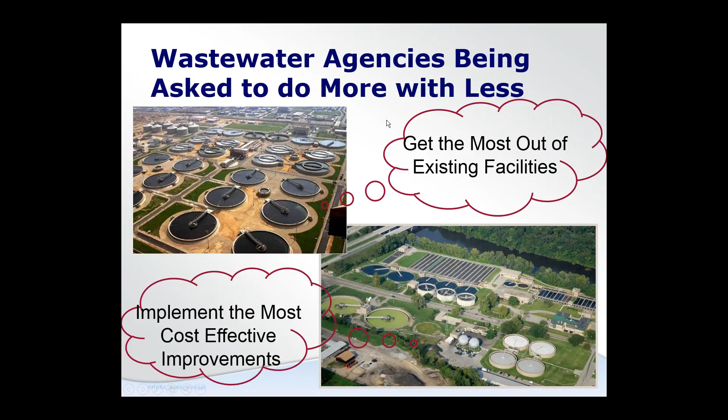With that, it sounds like we're off. Hi, everybody there in the Northwest. I'm Steve Walker, and this other voice next to me is John Fraser. We're in the Denver, Colorado area today, but feel very fortunate to speak with you up there. I'll just preface that I'm struggling through a migraine today, so if it sounds like I drop off the end of the world, there's a reason for that. John knows enough to pick up when I struggle. So off we go.

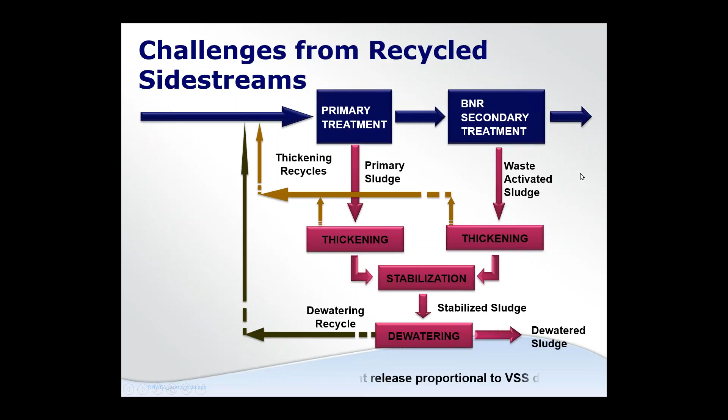Just to set this up at the beginning, there's a reduction in nutrient standards happening throughout the United States. We've seen ammonia standards ratcheting down, and now there's a focus on total nitrogen, which includes ammonia, nitrate, and nitrite in everybody's effluent. This is happening from Maine to Florida and from Southern California to the Puget Sound. On top of that, regulators are also now focusing on total phosphorus. Both of these reductions tend to happen in the same type of secondary treatment processes, so we actually have competing treatments happening in basically the same footprint.

At the same time, I'm an operator, John's an engineer, and wastewater agencies are being asked to do more with less. As an operator, we're trying to get more work out of existing facilities, existing personnel, and existing budgets. Engineers are being asked to implement the most cost-effective solutions. So how can we go about removing this ammonia and nitrogen, and also removing phosphorus, without driving up our ratepayers' budgets or costs?

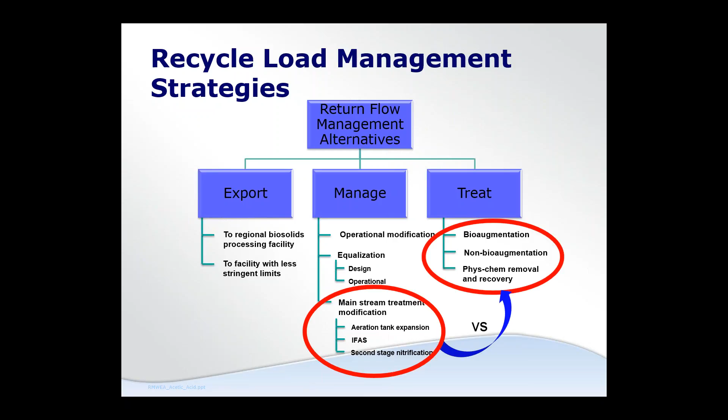Is there any advantage in a cost profile and a performance profile for handling side streams separately? Some of the challenges: there's streams that come off thickening, and streams that come off dewatering, particularly after solid stabilization in an anaerobic condition. These have several impacts. In the digesters, for example, the release of nutrients returned through recycle streams from dewatering is proportional to the VSS destruction. As volatile solids are destroyed, they release their cell material, and that cell material contains a lot of nitrogen and phosphorus.

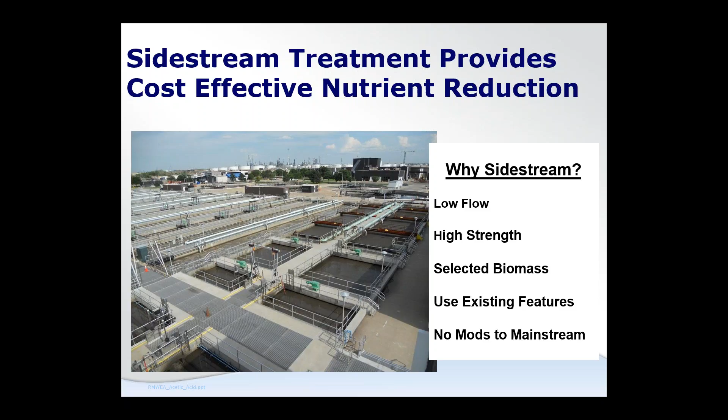Let's take a look at what side stream treatment might be able to do for you. There's different ways to tackle nutrient management. We can export our problems to somebody else with regional facilities or to facilities that have less stringent limits—these are likely not long-term feasible. We can manage these problems with operational modifications through equalization or mainstream treatment modifications, or we can treat it through some sort of biological or physical-chemical treatment. For us today, we'd look at the difference between doing mainstream modifications versus managing or treating the problem.

So for today, we're looking at side stream treatment, and we're going to start focusing in on exactly what was experienced at the Denver Metro plant and then how that can be applied elsewhere. Side stream treatment does provide some cost-effective nutrient reduction. Why would we even entertain side stream treatment?

Primarily it's a low flow—you're just treating a small portion of the total flow in any treatment plant. And it's a high strength flow, so we've got a better idea of what kind of load we're dealing with in that small flow. We can use a selected biomass—you'll find out as we talk further today that we can actually grow nitrifiers in a little nitrifier-type environment to go after the ammonia in a localized environment. We can use existing features if they're there, for instance an extra tankage, an extra primary clarifier or two, or aeration basins that have been taken out of service for some reason. And there's probably the ability to do this without modifying the mainstream treatment processes within the treatment plant.

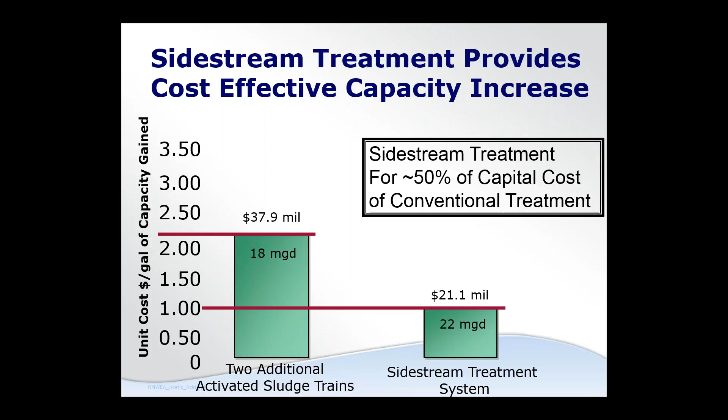In this particular example, this is exactly what happened at Denver Metro. In 2001, we went through a master plan study to look at the best approach to deal with the ammonia load being generated at that treatment plant and arriving at that treatment plant. In round figures, the ammonia load coming into the treatment plant was about 60% of the total ammonia load, which meant the centrate from dewatering was 40%. Those numbers were actually 8 to 10 tons per day coming into the plant and 6 to 8 tons per day coming out of centrate treatment on bad days.

So we had to figure out a way to do this cost effectively. Throughout the master plan, we focused in on building additional aeration basins with additional clarifiers to handle that load in a traditional manner.

As we got into that, we determined that was going to cost, in roughly 2001 dollars, $38 million to build 18 million gallons of capacity. Big numbers, this was a big plant. At that particular time it was a 167 million gallon a day footprint. So as people got to putting their heads together and thinking about different ways to go about it...

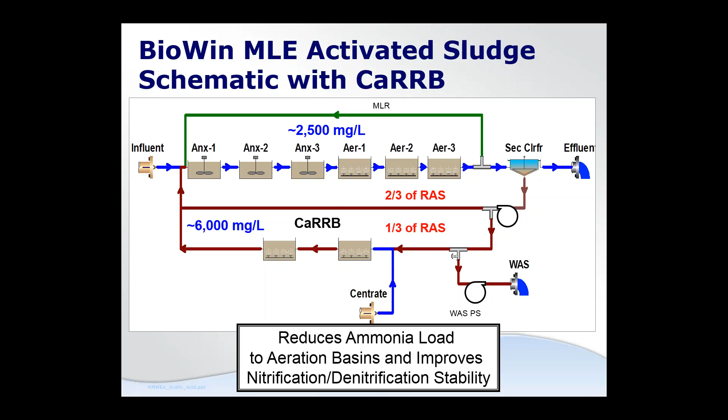We call it CaRRB in case anyone wonders, because the title, centrate and RAS reaeration basins didn't fit on the title block of the drawing, so we had to shorten it up. If you ever hear this term, that's simply what it means: centrate and RAS reaeration basins. Pretty much calling it the name that it is.

So we've also shown here a schematic that's more BioWin type output, for those who enjoy process simulation modeling, that essentially shows the same system: a multi-stage MLE process with some aerobic and some anoxic zones, a RAS return coming off the clarifiers, and then a portion of that being routed through a CaRRB basin for sidestream treatment with centrate being fed into the CaRRB basin.

Typically what we designed around in this case is about one-third of the RAS flow going through the CaRRB basins and about two-thirds of the RAS flow bypassing the CaRRB basins. Actually, Metro's done some testing on this, and they can manipulate the environmental conditions and get different performance outcomes by varying the amount of RAS that they put through the side stream treatment.

So if you think about this, and you have a typical activated sludge that's running at maybe 2,500 to 3,000 milligrams per liter of mixed liquor in the aeration basins, that goes through a secondary clarifier, and there's a compression factor on the RAS, let's say it's 2 to 3 to 1 -- I think we've shown 2.5 to 1 here. That puts a mixed liquor concentration of about 6,000 milligrams per liter into the side stream treatment basins.

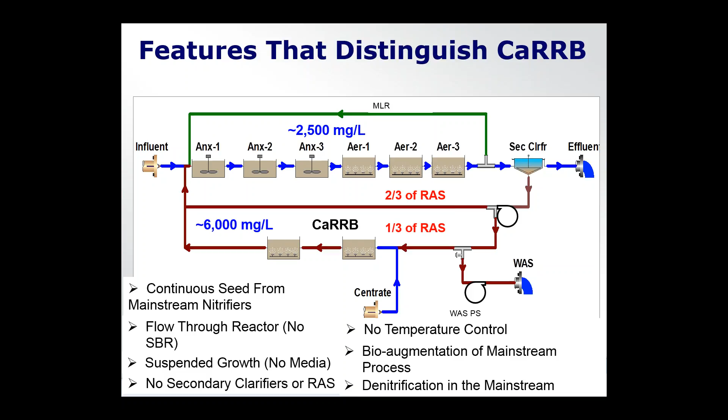We get a continuous seed of mainstream nitrifiers from that CARB basin; it's constantly being fed 24/7 RAS flow, and it's consistently fed centrate. So anytime there's flow coming into that basin, there's flow going out, and that flow goes back into the influent, back through the aeration basin. So there's nitrifiers consistently going to every aeration basin that's being fed, that's in service that particular day.

There's flow going through the reactor. It's not a sequence batch reactor type of process as some of the other different types of ammonia reduction processes are out there. From an operator's perspective, I'm not a batch type of person. I like to be able to operate something continuously, turn it on and off when I want to, not wait for it to run through a cycle.

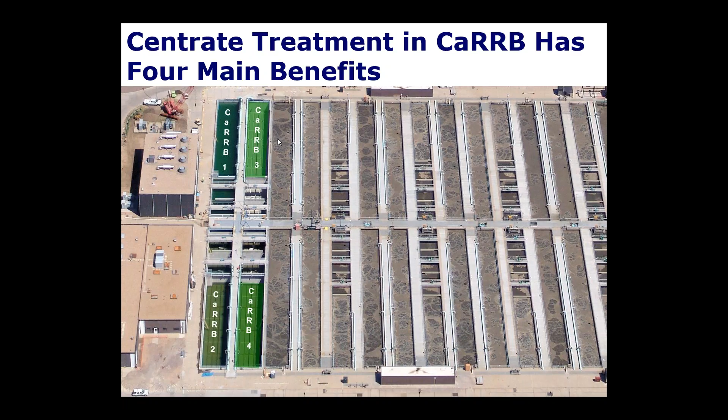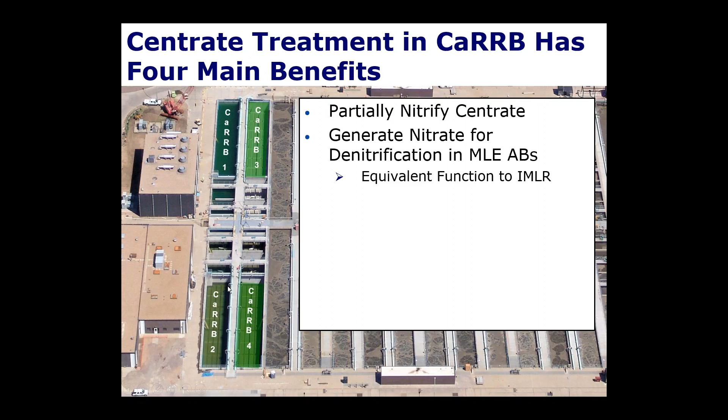It's suspended growth. There's no media, not an IFAS type media with certain nitrifiers growing on it to do this kind of work, similar to an ANITA Mox. I know Dr. Meltzer talked about DEMON and Anammox processes. There's one called ANITA Mox that's essentially an Anammox with IFAS media. This particular process doesn't rely on any attached growth on IFAS media, so it's a different kind of maintenance requirement than for the carb type basin. There's no secondary clarifier, and there's no additional RAS required.

There's no temperature control. The Sharon process, we know, requires temperature to maintain the ammonia reduction. This one, there is no temperature required to maintain the carb process.

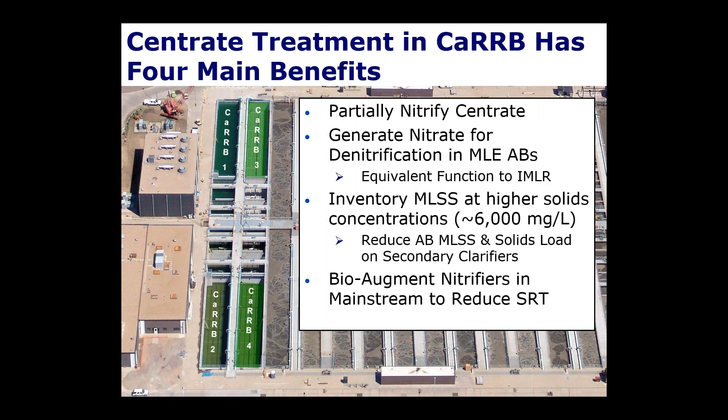It does provide bio-augmentation of the mainstream process. What that basically means is there's a whole group of microorganisms ready to do nitrification, flowing into these aeration basins, into those anoxic zones, ready to go to work. These guys are on steroids, jazzed up and ready to rock and roll. And there's denitrification happening in the mainstream, something we discovered over time, and John will elaborate in more detail, but there's additional treatment happening within the different channels and flow streams on the treatment plant.

This is what the actual plant looks like. You'll notice these carb basins are over here on the left-hand side of the screen. There are 4 of them, carb basins 1 through 4.

When this treatment plant was originally designed in 1965, Mead and Mount were the designers. They are no longer in business as far as I know. But this particular area where these carb basins were set was left open, and for years we used to play basketball right here and have picnic tables. It was set up for some sort of pre-aeration or secondary treatment by the designers in 1965. That area became available, and as we got into the master planning and then the planning for this particular project, it became apparent that this was an ideal spot to put this particular material.

The benefits of our carb process, just to drive them home again: we partially nitrify the centrate. On the next slide we'll show you where it comes from. We generate nitrate for denitrification in the MLE basins. It provides the same function as internal mixed liquor recycle.

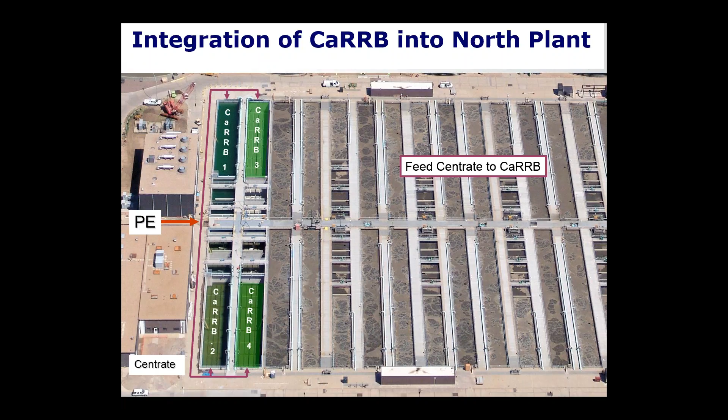We inventory MLSS at a higher concentration. The bugs inside of the carb are 6,000 milligrams per liter. The mixed liquor inside of the aeration basins is roughly 2,000 to 2,500 milligrams per liter. That reduces the load on the secondary clarifiers, which was of tremendous importance in this particular treatment plant.

We bio-augment, once again, we put these nitrifiers into that mainstream, which gives us a boost in treatment.

This is what the plant looks like. The PE comes right down the main channel here. Centrate is brought in, roughly 1 million pounds a day worth of centrate going into 1 of 4 carb basins. Each one can be fed equally or in any proportion thereof.

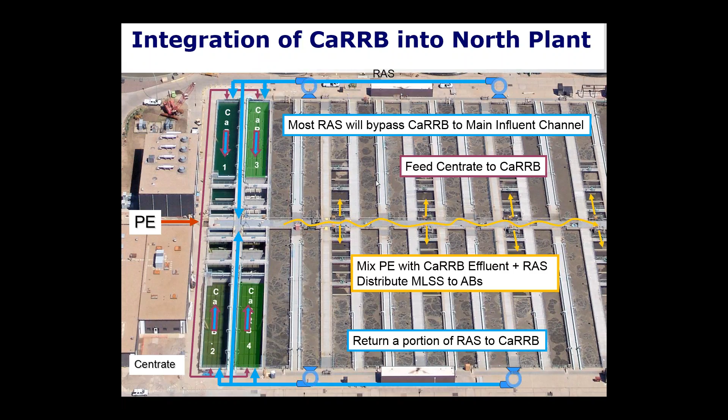Over time, the district has been experimenting, and right now I believe they're running 2 basins in a carb process, and experimenting with 2 other ones in some other modified form of ammonia removal as they play with their processes.

Once again, the PE goes right down the middle, and in the original old plant, these were 4 distinct quads. There were 3 clarifiers and 3 basins connected to 1 RAS pumping station. For me as an operator, I had 4 distinct treatment plants I had to operate out here. It was a pain, trying to figure out which one was operating as what. With a rectangular channel and basin, with square rectangular gates coming off the side, loading into each one of those basins was never quite the same.

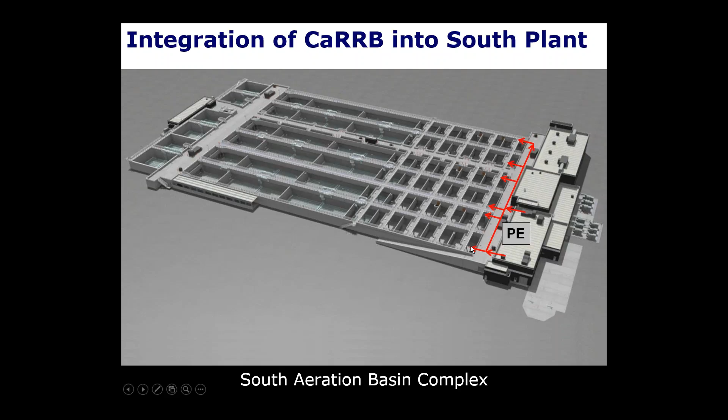So between basins, you could go from one basin to the next one side by side, and there would be a 400 to 600 milligram per liter difference in the concentration of the material inside of those basins. It was driven just by the way the main channel fed these basins.

As part of this upgrade, that feeding problem was eliminated. The RAS originally came back from the clarifiers into one of these 3 basins. The clarifiers did not withdraw consistently, and we always had a blanket on the furthest one away, but wouldn't have a blanket on the nearest one. Once again, you'd have problems with solids blowing out of one of the clarifiers. That was modified as part of this project.

But the important thing to note here is this RAS is now brought back and introduced into the carb basins. It's also introduced right between the carb basins back to the main channel, as demonstrated by that arrow. So roughly up to 70% a day of the RAS goes right past carb back into the main channel, mixes with the PE effluent, and goes into the aeration basins.

What this provided was a common influent to every one of those aeration basins, and I'll demonstrate in the slide coming up here. We had common mixed liquor concentrations throughout almost immediately after starting this process up.

So the district incorporated this carb process for sidestream treatment into their north secondary modifications, and early results were successful for them. So they elected to incorporate the same process into their new south secondary plant. This plant just went online the first of this year, when the new discharge criteria for the river went into effect.

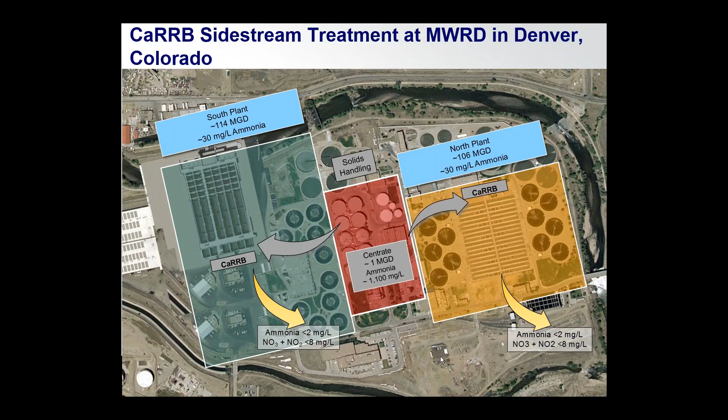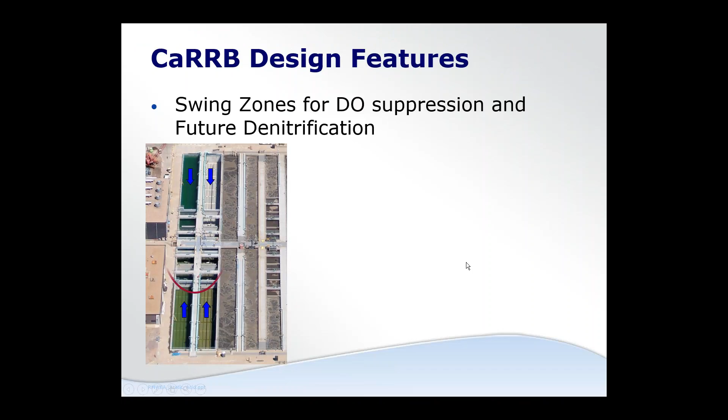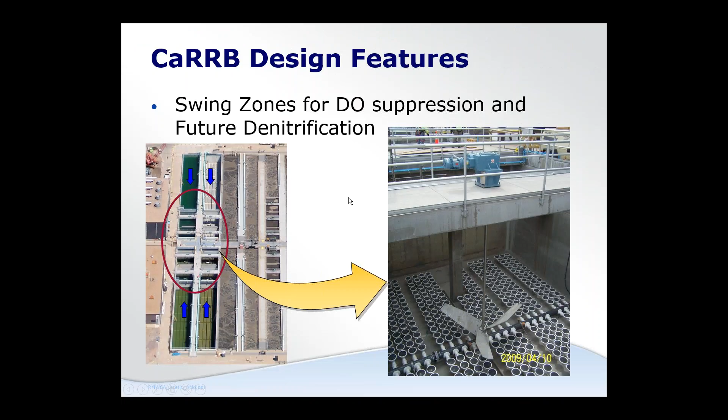And then centrate is also fed into those CaRRB basins, and then the effluent from CaRRB is mixed with the mixed liquor return and flows back through some channels to the anoxic zones of each of the aeration basins. So this was a little bit more ideal piping and hydraulic orientation in this facility than when we didn't have a clean slate to work with.

So Steve, why don't you talk about the overall end result?

With the original master plan, with the permit criteria at Denver Metro, we were allowed something to the effect of up to 15 milligrams per liter of ammonia, and nitrate was well above some number like 7 or 8 milligrams per liter on a monthly basis in the early 2000s. Over time, the first thing that was tackled was the north secondary with the CaRRB modifications.

That plant went up to 106 million gallon a day capacity. The south plant, which doesn't show the full transition here, was a Purox system, treating roughly 60 million gallons a day on a good day with no ammonia reduction. So whatever ammonia level came in, like 30 milligrams per liter, that's what went out the other end.

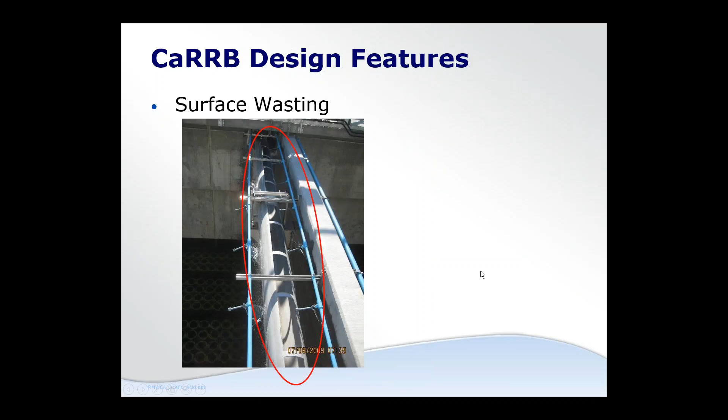Over time, with all the modifications and the new permit, we are now being required to produce ammonia under 2 milligrams per liter at all times, and we have a weekly nitrate plus nitrite value of under 8 milligrams per liter for both the north and the south. These two effluents are blended to make the final effluent number.

As you'll note here in the center, there is roughly 1 million gallons of centrate being produced daily. When the plant first started up, the north secondary was being fed that total ammonia load at roughly 1,000 to 1,200 milligrams per liter going mainlined right into this whole process. Since the startup of the south plant, that load is now being split roughly 50-50.

There's some additional design features that went into CaRRB that help us operators. There are some swing zones designed in there for DO suppression and future denitrification. Those are outlined here. You'll notice we have fine bubble diffusers and just a mixer, depending on which mode you're going to run that swing zone in.

There's alkalinity and carbon addition. You need alkalinity for nitrification potentially, and the Denver Metro District has had some issues with pH control over the years, so alkalinity was determined to be something that may be needed.

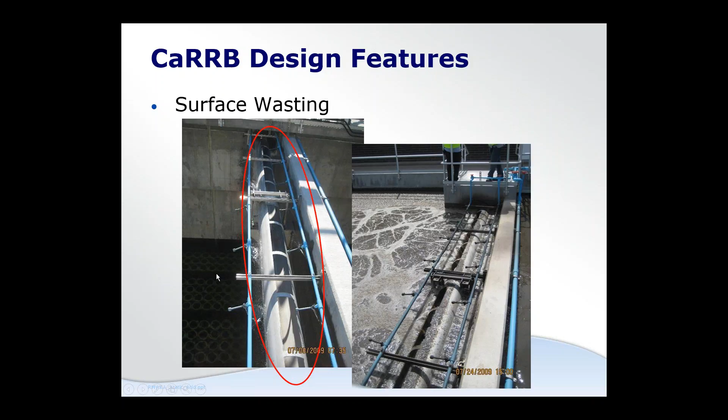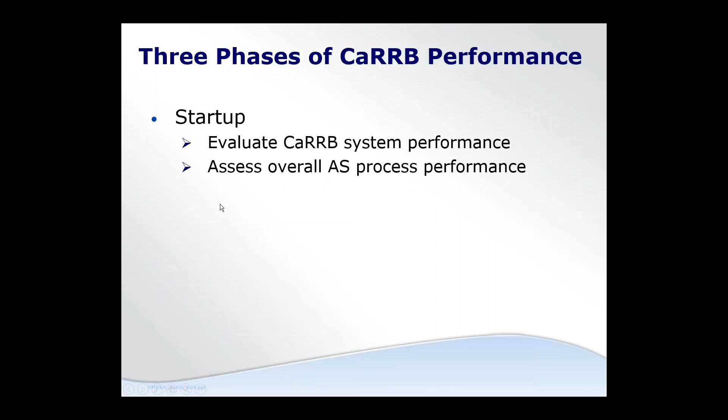I don't believe it's been used since this process has been started up. There's carbon feed to ensure denitrification is happening, so you've got enough carbon to make sure that process kicks in. That denitrification in the CaRRB basins was intended for future phosphorus reduction—if the plant went to future phosphorus removal, they would have to denitrify before they went into the anaerobic zones. That's not being used right now because they're meeting their phosphorus limits in other ways, but it was designed into the facility to allow phosphorus removal in a CaRRB system as well.

One of the other features of CaRRB is surface wasting. You'll notice this is a rotating weir, not unlike what you see on some clarifiers, built into the end of the CaRRB basin. What it allows us to do is capture the floating scum that comes out of that CaRRB basin footprint and waste it off of the treatment plant. On this particular plant, it goes to a dissolved air flotation process.

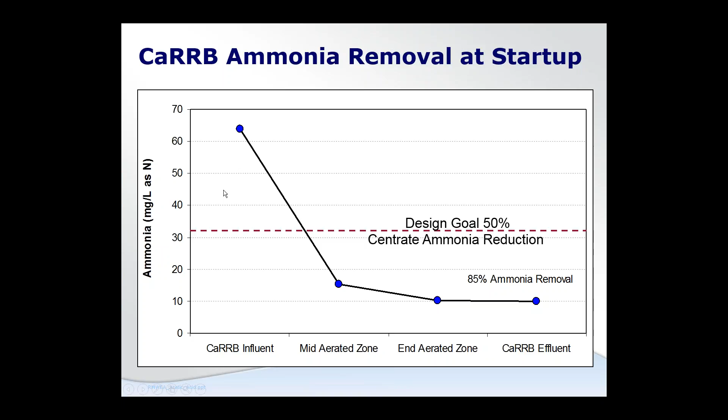Since the CaRRB is aerated, the filaments want to float, so they'll float up and be wasted off. Since the RAS is returned back 30 to 40%, whatever the set point is, total RAS in the plant is going through this CaRRB basin over a period of time—theoretically within a day, any of that RAS is going to go through a CaRRB basin. A good portion of those filaments are going to float up and be wasted out. Therefore, that filament problem—and folks that know the Denver Metro plant know back in the late 90s you could walk across some of these aeration basins and not sink—that particular problem is no longer an issue at the Metro District whatsoever.

I think the point on that surface wasting, Steve, if you go back one slide, is it's a great feature if you guys can incorporate it anywhere into your treatment facility. I know that B&C and Denny Parker are big advocates of selectors, and the configuration may be a little different, but the philosophy is the same: if you have a spot where all the RAS passes through, you can surface waste off of that. It really helps the process perform better, and CaRRB or any side stream process might offer that opportunity for you, and you should think about taking advantage of it.

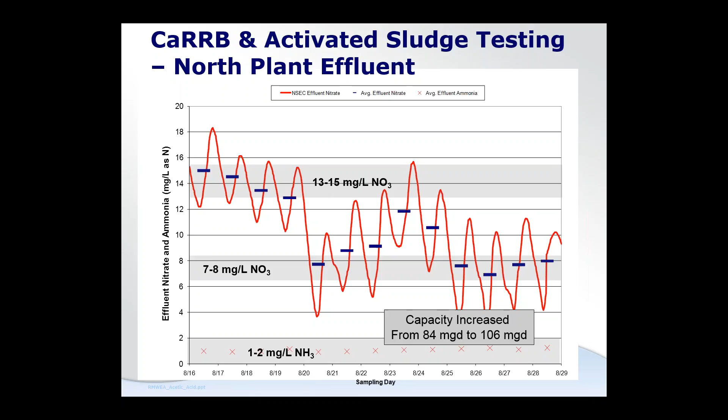When we first started this thing up, within a week—literally within a couple of days—we determined we were getting 85% ammonia removal in the CaRRB basin. A good portion of that ammonia removal was happening within the first 100 feet of that basin, well before we thought it was going to happen. The design goal for the entire basin was 50% reduction, but we were getting 85% reduction, literally into the middle of the first aerated zone.

Just to note, for those of you considering this side stream treatment: so often what limits the performance of the side stream is alkalinity limitations. You're alkalinity limited, and you can only get so far—that's what the models predicted, that we would only get 50% removal due to alkalinity limitations. It turns out that RAS is a good source of alkalinity, so we were able to run a little higher RAS rate through CaRRB and drive more nitrification in the side stream and avoid some of those alkalinity limitations.

And if you look at the nitrate profile, it pretty much mirror-imaged what we anticipated for the ammonia reduction. So we got much more nitrate because we had more ammonia removal produced in CaRRB, and that just resulted in great denitrification when we got to the anoxic zones in this process.

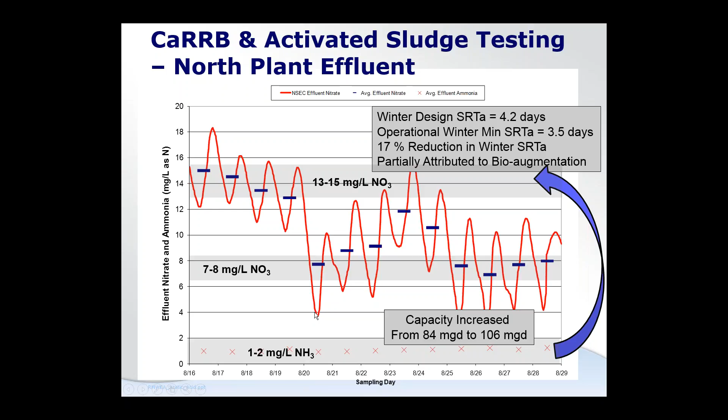This is a chart that shows the before and after startup of CaRRB for the entire north secondary, showing the effluent nitrate and ammonia concentrations by sampling day. This period here was before CaRRB started up, and this was after CaRRB started up. We also showed with the X's the ammonia, and I wanted to show you that the ammonia coming out of the overall plant wasn't impacted—it was running about 1 to 2 milligrams per liter before CaRRB, a little bit higher but still about 1 to 2 milligrams per liter, certainly below discharge criteria after CaRRB went online.

But the big impact was the overall impact on nitrate reduction. We were creating so much nitrogen that we dropped from 13 to 15 milligrams per liter before CaRRB.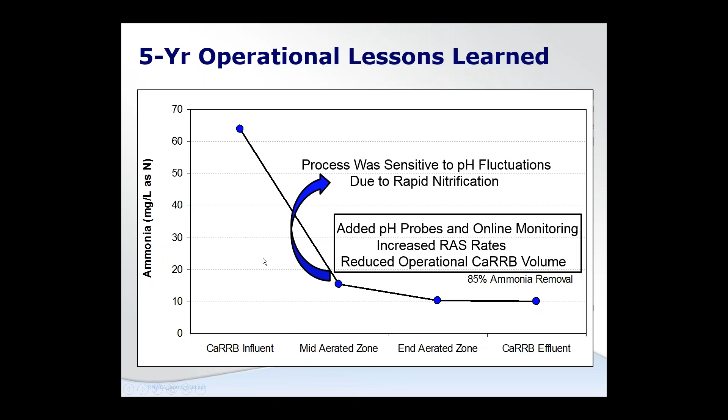We were creating so much nitrate that we were able to remove it in the anoxic zone and drop down to 7 to 8 milligrams per liter. Currently, both the north and south secondary are operating at close to 5 to 6 milligrams per liter of nitrate after a couple years of being able to dial this process in.

A couple things on bioaugmentation. I wish I could show you some scientific data that can quantify the impact of bioaugmentation on the process, but I don't have that. I think the industry's working on that, and we're certainly working on that too.

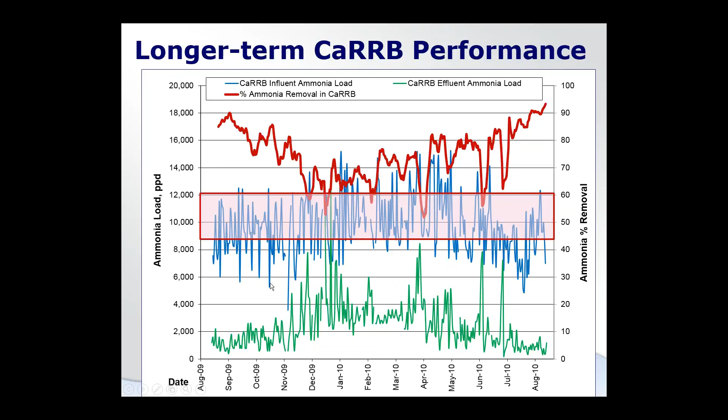I'll give you some anecdotal information. The wintertime 16 degree C SRT for this facility was designed at 4.2 days, that's the aerobic SRT. The operators at Metro intentionally reduced the SRT during the winter to see what the process could do, and were able to bring it down to 3.5 days before they had ammonia breakthrough. If we assume that reduction between design and actual operating SRT is partially attributed to bioaugmentation, it's about a 17% benefit related to bioaugmentation.

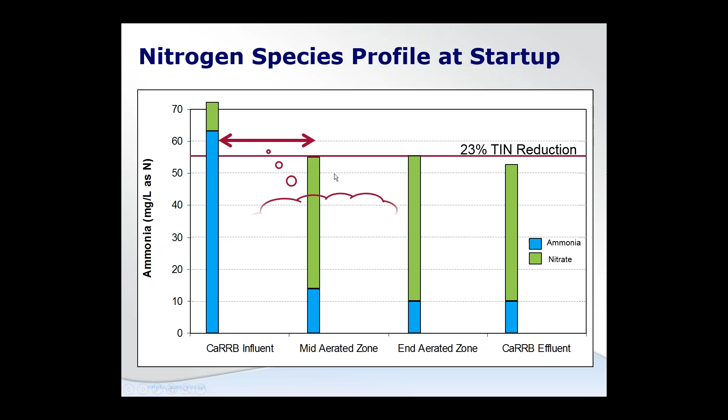So I'm a personal believer in bioaugmentation. I think the challenge for the industry is to quantify the amount so design engineers can start incorporating that into the design process, saving money for the operators of these facilities.

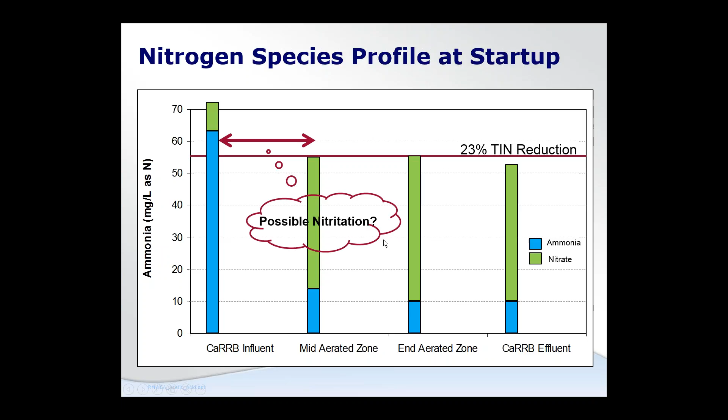A couple lessons learned over the first 5 years of operation: this CaRRB process was pretty sensitive to pH due to rapid nitrification. This quick, unanticipated drop in ammonia ended up resulting in a drop in pH in the later zones of the process. So the district added online pH probes and tied those probes to the operation of the facility.

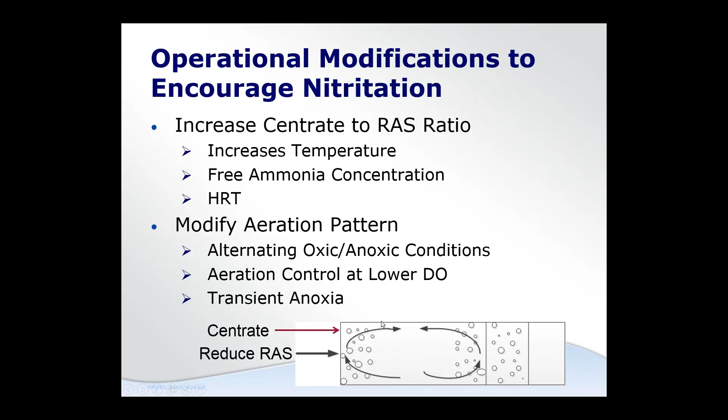What they do is increase the RAS rate if the pH gets too low, which essentially drives the profile more toward the end of the basin, and they control the degree of nitrification throughout the basin.

The other tool they use is changing the number of CaRRB basins online. They found they can operate pretty well with 2 CaRRB basins rather than 4 with the loads going to that north side, without causing pH drops. Where the facility was originally designed for about 20% of the total biomass in CaRRB, subsequent work has shown you really only need about 10% of the inventory to get the nitrification that's anticipated, limited by the amount of alkalinity you have.

Here's a little bit longer term performance. Some longer term data shows that in the wintertime they run maybe 60% removal up to 90% removal. The district really likes to run this facility in the 45 to 60% range, and they do that by varying the number of basins online because they've got enough plant that they don't need to push that any harder.

I'd like to share something the district has done recently. They noticed something interesting during startup: the nitrogen balance was not preserved. What came into the CaRRB basin in the form of ammonia and nitrate was not preserved through the process. They were measuring an apparent loss of about 23% of TIN. So the question is, where is that TIN going? Possibly nitritation, simultaneous denitrification, or something else going on in those aeration basins?

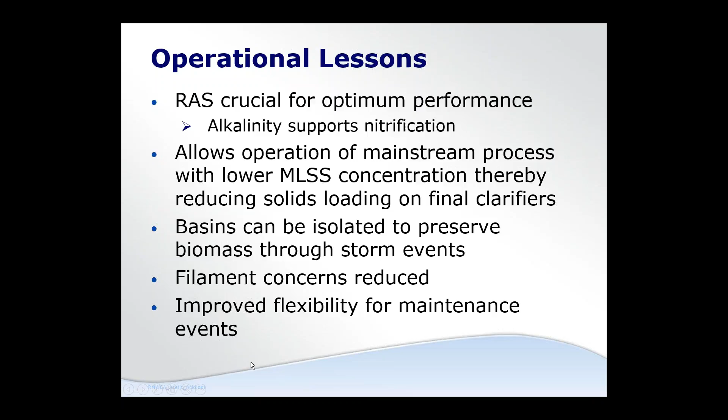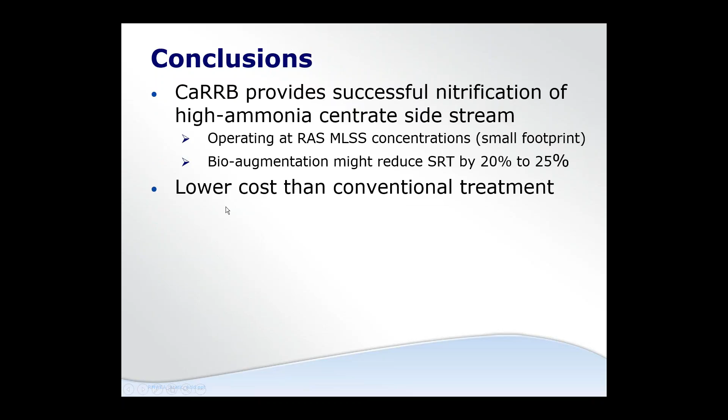The results showed that if they controlled this, they could get up to 51% total nitrogen reduction in the side stream, where they observed 23% without doing anything, 51% if they tried really hard, and found they could be stable at about 40 to 45% TIN reduction. So that was a great lesson for them, that if they wanted to do even better with some nitritation in CaRRB, it was possible.

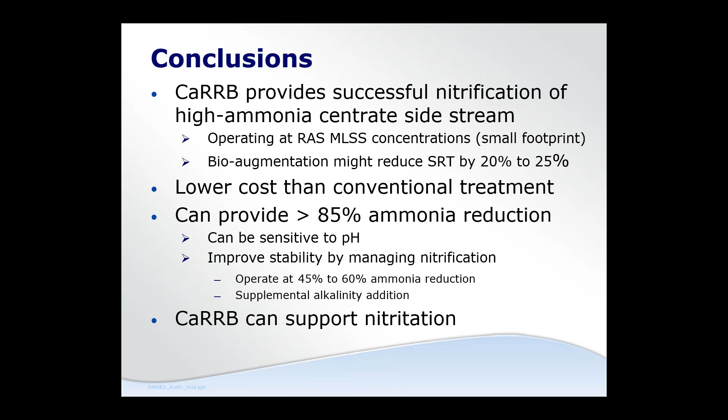We learned that RAS is crucial for optimum performance. It truly is. There's a lot of alkalinity - whatever alkalinity is going out in the effluent of your treatment plant, whatever goes out in your clarifier effluent, is also in your RAS.

So if you've got 300 parts of alkalinity going out in your effluent, that can also be returned in your RAS. You need that RAS to support nitrification. You need that alkalinity. It allowed operation of the mainstream process to lower that mixed liquor concentration, which lowered that

solids loading on the final clarifiers. For me, that was important as we went through construction, because 3 of these clarifiers were offline at any given time. But afterwards, with the 10-foot sidewalls, it still allows us to operate this plant with an awful lot of flexibility.

The basins can be isolated to preserve biomass through storm events. If you can picture this, if you know you've got a storm event coming, we all watch weather, we can shut off a portion of that RAS that's going to these basins, keep the centrate coming in if we want. We're storing all those solids at 6,000 to 8,000 milligrams per liter in these basins. After the storm event has passed, we can release these solids back into the basins. These bugs are ready to go back to work, and we haven't lost them to the effluent like sometimes happens in a treatment plant. We've reduced the filament concerns, and then we've improved flexibility for different kinds of maintenance events.

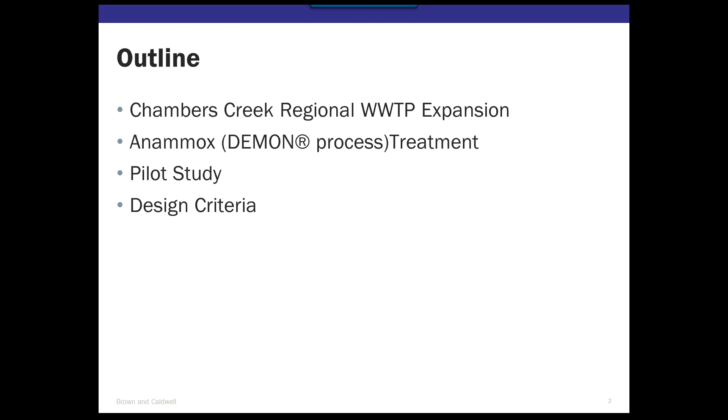So our second presentation of the day is pilot scale testing of Demon Sidestream treatment for expansion of Chambers Creek wastewater treatment plant in Pierce County. And our presenter is Dr. Henrik Meltzer. Dr. Meltzer is a wastewater treatment process engineer with Brown & Caldwell with more than 30 years of experience. He is the company's senior process lead for the Northwest Business Unit for biological treatment plant design. His work is focused on process modeling of biological treatment systems with and without nutrient removal, the design of aeration systems, and plant capacity assessment through the use of computer simulation tools and stress testing of clarifiers and solids handling equipment. His specific design experience includes conventional activated sludge, membrane bioreactors, sequencing batch reactors, oxidation ditches, nitrification, denitrification, biological phosphorus removal, trickling filtration, chemically enhanced high-rate clarifiers, and Sidestream treatment processes. Dr. Meltzer also oversaw the first ever Anammox Sidestream pilot study conducted in the Pacific Northwest at Chambers Creek Wastewater Treatment Plant in Pierce County, Washington.

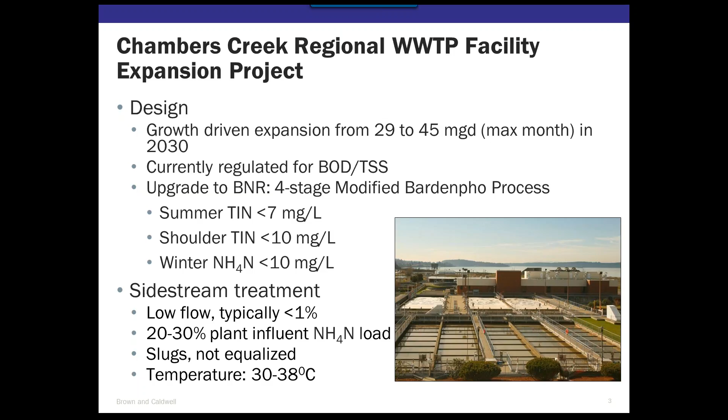Just a quick outline of what I'm going to cover. I'll begin with a short background of what led us to the pilot study, a little bit about the Anamox technology, and then I'm going to focus mainly on the pilot study and finish off with some design criteria for the system that's under construction right now.

So the Chambers Creek facility design was based on a growth-driven expansion, as you can see, from 29 to 45 mgd on a max month basis for the year 2030.

Currently, they're really only regulated for BOD and suspended solids removal, and there are no nitrogen removal requirements for this plant. But folks in the Puget Sound area are all anticipating some form of nitrogen limitation.

Given the fact that we had to expand this plant, we designed it such that we could modify the operation to meet the 3 levels of discharge criteria shown on the screen for the different seasons: summer, winter, and something we call shoulder, which is related to runoff and snowmelt conditions.

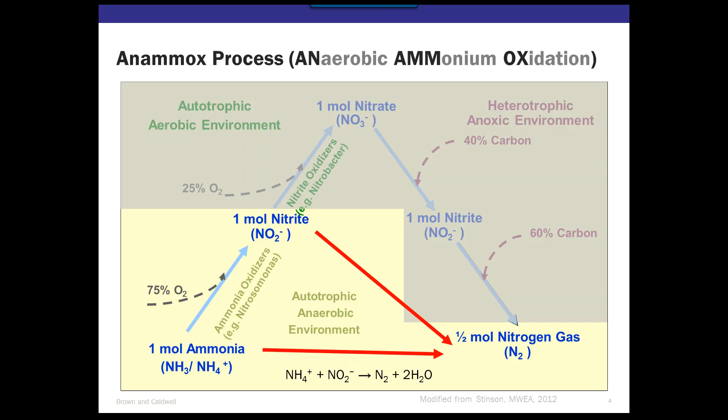Incorporating sidestream treatment seemed to offer significant cost advantages because, as Steve mentioned earlier on, the dewatered sludge dewatering stream is relatively low flow compared to the total plant influent, and about 20 to 30% of the influent ammonia load is associated with this stream.

It's also, in many cases, delivered on a non-continuous basis. It's a function of when the plant chooses to operate the dewatering equipment, and it's also very hot.

Dr. Stenzel presented on the same topic, sidestream treatment, a month and a half ago or so, and I just want to recap in one slide the essence of the Anamox technology. Anamox is short for anaerobic ammonium oxidation, and what it allows is for two-thirds, or for a large part of the typical nitrification, denitrification one is used to seeing in biological nutrient removal processes, as was described in the previous presentation.

In this case, we allow for partial nitrification to nitrite nitrogen using the AOBs, and that process is stopped, at which point the Anamox bacteria take over and grab a mole of ammonia and a mole of nitrite and go straight to nitrogen gas in a one-step biochemical process.

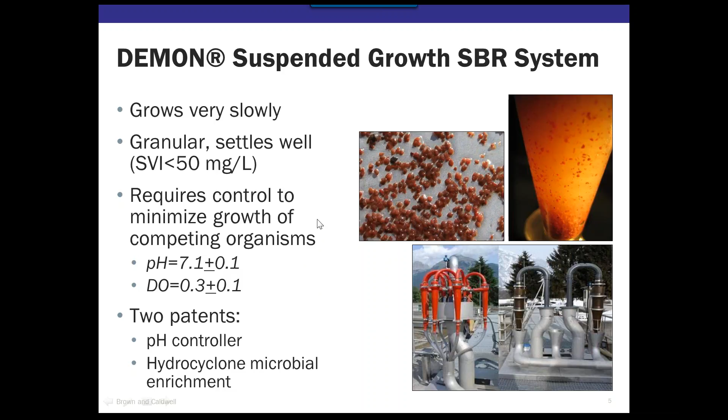At the time that this was being considered, the only commercially available sidestream treatment process using Anamox bacteria was that offered by the Demon technology, which is available in the United States, and it takes advantage of the granular structure of the organisms.

You can see here these tiny, tiny pellets. I like to think of these - you would recognize the size and shape if you think of chocolate sprinkles on ice cream. That's what they look like and feel like. Because they're very dense, they settle very well. The SVI is typically much less than 50 mil per gram.

And this allows us to take advantage of the sequencing batch reactor technology. There is some control to minimize the growth of competing organisms, like the NOBs I was referring. There are controls in place to manage the pH to around 7 and the dissolved oxygen on the order of 0.3 milligrams per liter.

There are two patents associated with this technology. One is associated with the pH control system, and the other is the use of hydrocyclones, which seem like pretty simple technology, but until people stumbled upon this, the process was a little unstable.

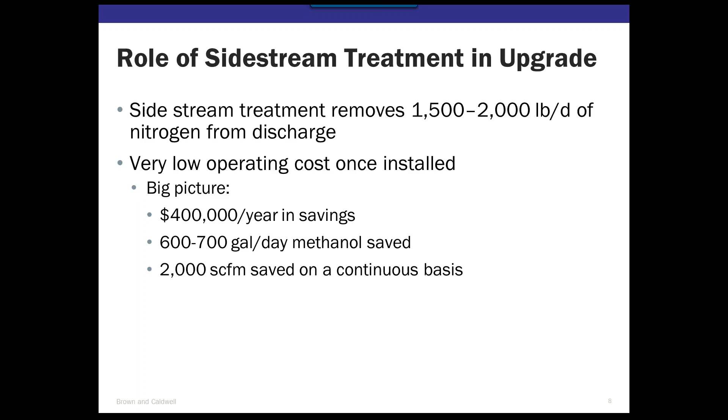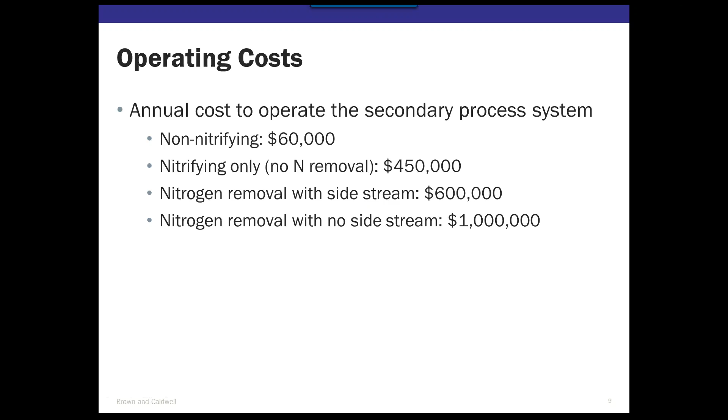The process is sensitive to nitrite accumulation, and we'll speak about that later on. There are almost 48 plants which have been in operation for 8 to 9 years now, as of 2013. In North America, there's one in operation at HRSD in Virginia, another in operation in Florida. Ones in design are at DC Water to service the centrate from the newly constructed Cambi process—that's close to startup—and another close to startup, if not already, in Guelph, Ontario, Canada, and then obviously Pierce County's plant.

So let's take a quick look at what convinced Pierce County to take a look at this technology in more detail.

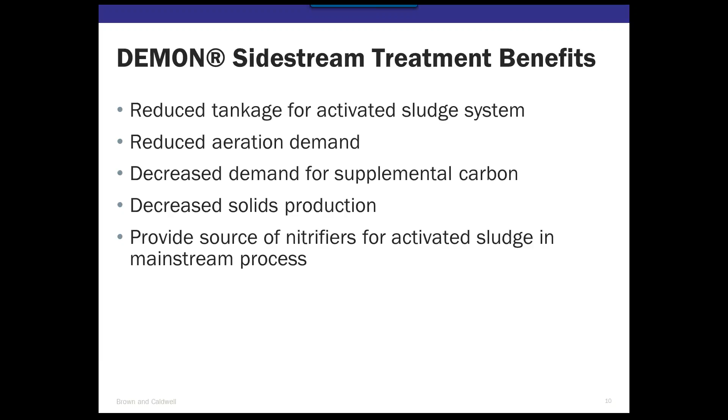If you do the math, the sidestream treatment process was required to remove between 1,500 to 2,000 pounds of nitrogen per day. Looking at it from the 10,000-foot overview, we estimated there would be $400,000 per year in savings in operating costs, primarily as a result of the 600 to 700 gallons per day of methanol saved by eliminating denitrification for the sidestream, and the 2,000 SCFM on a continuous basis because of the oxygen saved by not having to go to full nitrification.

If you look at the operating costs on an annualized basis for each of the 4 modes we could operate the plant—non-nitrifying mode, nitrification with no nitrogen removal, nitrogen removal with sidestream, and nitrogen removal with no sidestream, meaning the dewatering stream is returned to the mainstream—the difference between these two cases yields the $400,000 savings you saw in the previous slide.

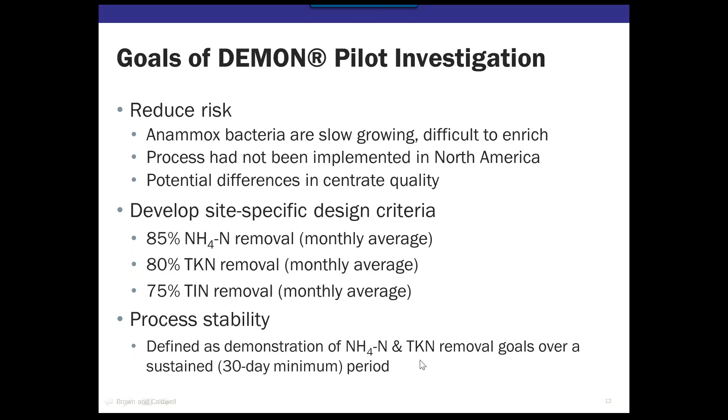The benefits of sidestream treatment are about a 10 to 20% reduced tankage for the mainstream activated sludge system, about a 10 to 20% reduction in aeration demand, about a 25 to 100% reduction in demand for supplemental carbon, about a 10% reduced solids production, and a source of AOBs that will be returned to the mainstream and supplement the nitrifying population in the mainstream activated sludge mixed liquor—a form of bioaugmentation.

So let's look at the pilot investigation. The goals were to minimize the risk. We started down this road about 6 years ago, and at that time the process had not been implemented in North America—in fact, most people didn't know about it. At that time, there was a huge concern that because of the very slow growth of the Anammox bacteria and the difficulty in enrichment, there was significant risk to the viability of the biological process. Also, centrate quality varies a lot from plant to plant.

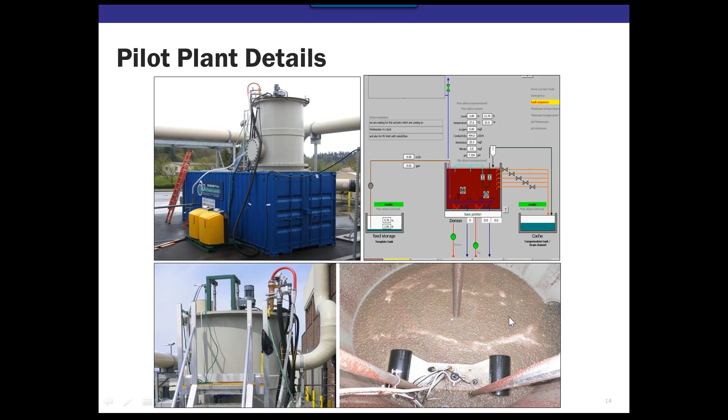So the county decided it would be appropriate to take on a pilot demonstration for their specific circumstances. We defined performance criteria for the pilot facility of 85% ammonia removal, 80% TKN removal, and overall 75% TIN removal. We also defined a process stability goal—looking at a sustained 30-day minimum period of achieving these performance goals.

In practice, this is what it looked like. It came in this box trailer, laying on its side. When righted, you can see the total height of this reactor is about 14 feet, although the actual side water depth is about 10.5 feet or so. These are the blowers sitting outside the facility, and up on top you see a close-up of the hydrocyclone and the mixer.

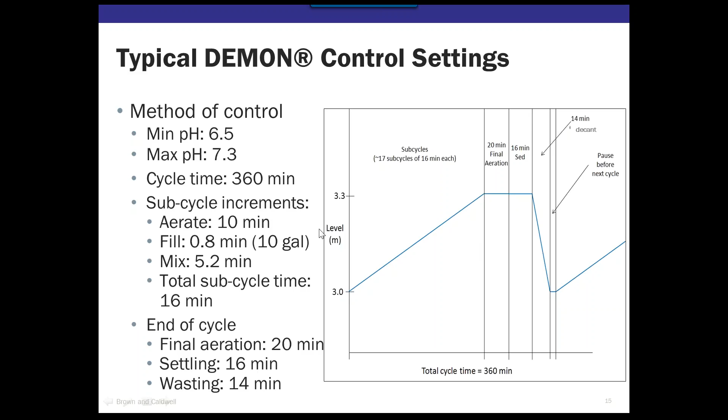Looking down inside the reactor, you'll see the stand for the online instrumentation and the mixer, and the reddish color representing the typical red color of the Anammox bacteria. This is just a picture of the schematic shown on the HMI in terms of what's going on inside the reactor.

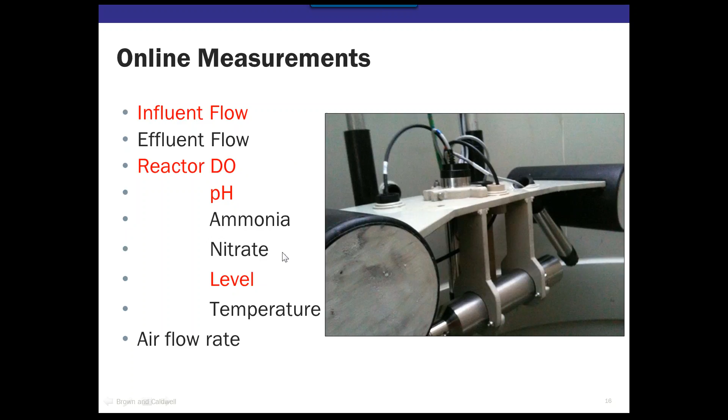So those of you familiar with an SBR would recognize this as a typical sequence of fill, aerate, settle, and decanting. But just to walk you through this process, shown here is the depth difference between the starting point at filling the reactor and the final point.

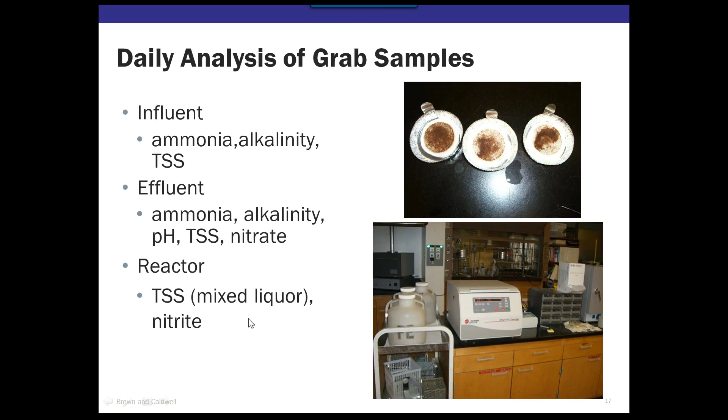The filling process occurs over a defined period, consisting of a number of subcycles where we go through an aeration step for 10 minutes, a 10-gallon addition over just under a minute, then mixing, so the total subcycle time is 16 minutes. The reason for doing this is to provide control for the pH, because you're adding alkalinity and consuming alkalinity, and this allows the controller to maintain fairly tight control if you're adding small amounts of the dewatering stream in this manner.

So once you fill the reactor up to the designated level, there's a final period of 20 minutes of final aeration, 16 minutes allowed for settling. You might say 16 minutes doesn't sound like much, but remember, these are granules - they settle like rocks, very rapidly to the bottom. Then there's a period for decanting, and a little time built in before the next cycle starts.

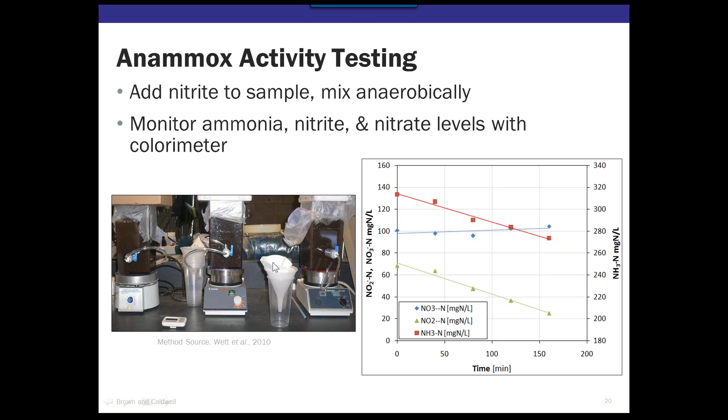So previously you saw a picture taken from above, but this is where we had the online instrumentation. At the time, we really didn't know what we should be monitoring closely, so we maybe erred on the excessive side. We monitored flow, dissolved oxygen concentration, pH, ammonia, nitrate level, temperature, and flow rate. As we'll see later on, there were really only 4 criteria that we really needed to monitor, and while it was nice to know these things, it wasn't necessary.

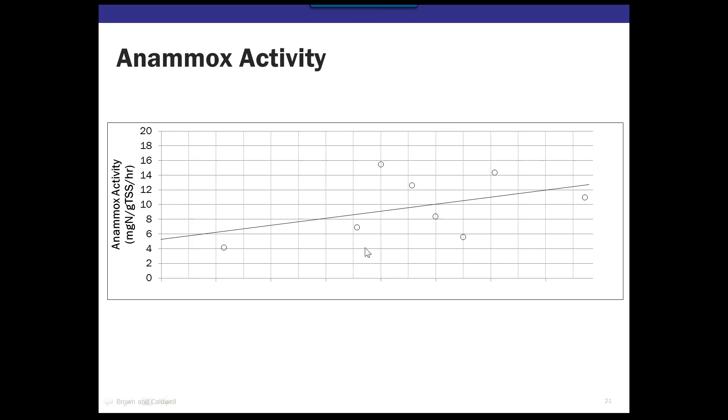On a daily basis, we grab samples of the influent, effluent, and reactor mixed liquor to measure ammonia, alkalinity, and suspended solids concentration. Similarly in the effluent, but we also monitored for pH and nitrate. And in the reactor we also monitored nitrite, and I'll explain why in a moment.

We also spent some time looking at methods of trying to assess the viability of the Anammox bacteria. There were a couple of methods developed by Bernhard Wett, who was the original inventor of this technology. Simplistically, one of them is to measure the activity of the AOBs, the ammonia oxidizing bacteria, by taking 2-liter samples, aerating and mixing them, having added ammonia to the sample, and then monitoring the decline in ammonia and the increase in nitrite and nitrate.

Here you see a couple of folks involved in the pilot demonstration: Lynn Williams from Brown and Caldwell, and Amanda Summers, who's the PM for this activity from the county.

The parallel test was to actually evaluate the activity of the Anammox. Having added nitrite to a sample of mixed liquor, these samples were mixed, and you can see the 2-liter vessels were covered so as to avoid any air intrusion, and then we measured the change in ammonia, nitrite, and nitrate levels, as you see here in the graph.

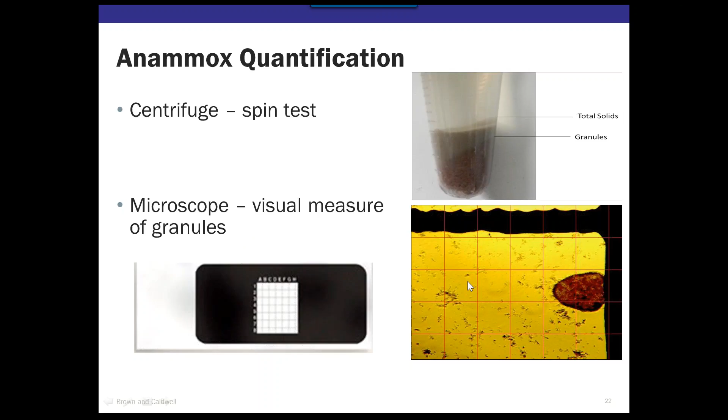The ultimate objective was to measure the activity in terms of milligrams of nitrogen removed per gram of TSS per hour. Over the course of the test, you'll see there's a gradual trend in the activity of the Anammox in the reactor.

The test is not as sensitive as we'd have liked. You can see the spread of data, so if you take lots of measurements, you can get a good trend. So we decided that we should take a look at some other methods that the operators could use on a daily basis.

The reason for all of these is that we can't use the mixed liquor volatile suspended solids as an indirect measure of activity of the activated sludge, because the Anammox bacteria are only one component of the mixed liquor. Somehow you have to try and get to looking at the granules.

One of the ways we started testing was to resurrect the old spin test typically used for monitoring mixed liquor solids by many operators. You centrifuge down the sample, and you'll see there are 2 layers of sludge, slightly different colors. You can see the red organisms below, and above are the heterotrophs that we don't need to grow in the system. This upper layer is removed by passing the mixed liquor through a hydrocyclone - the density difference between the layers is large enough for the hydrocyclone to get rid of the upper layer of sludge and retain the red organisms, which is what we need to retain. A very simple method, easily done, a very simple operational tool.

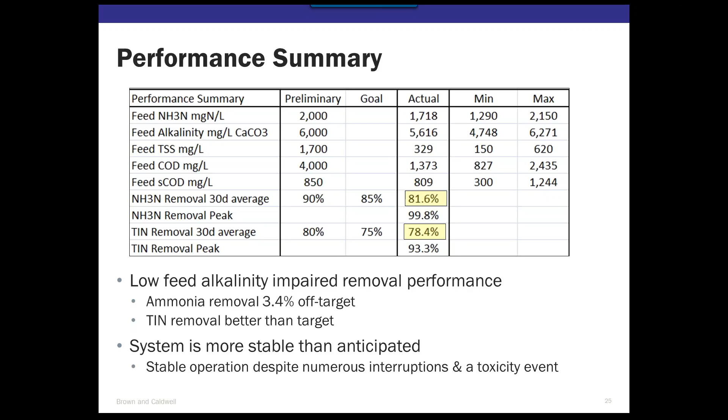We actually developed a different method of measuring stability, as we discovered that nitrite was probably the most sensitive characteristic to monitor. Nitrite would cause some inhibition, so as you'll see in a moment, we monitored that all the way through the study, and the target was to keep it below 10 milligrams per liter.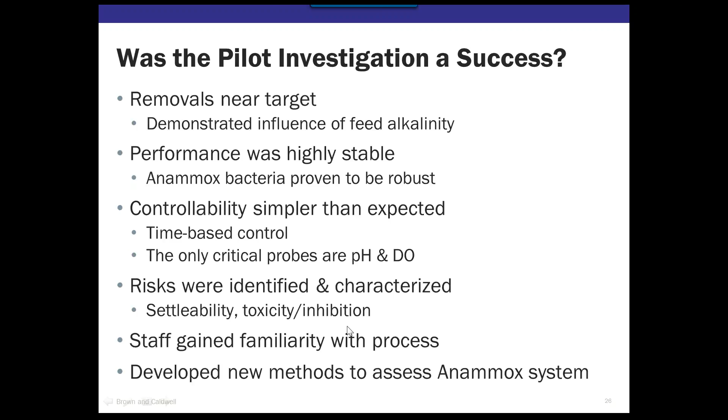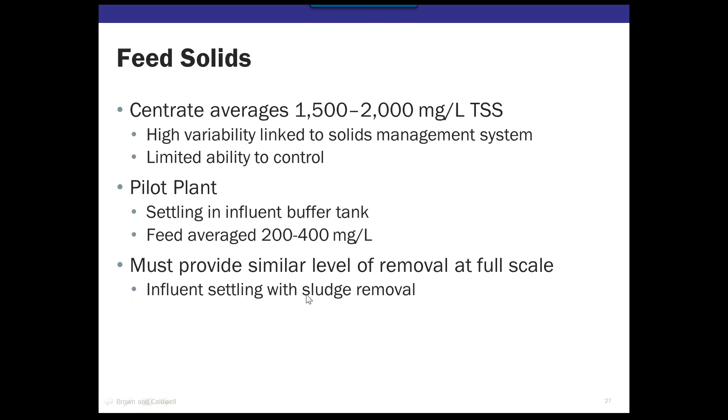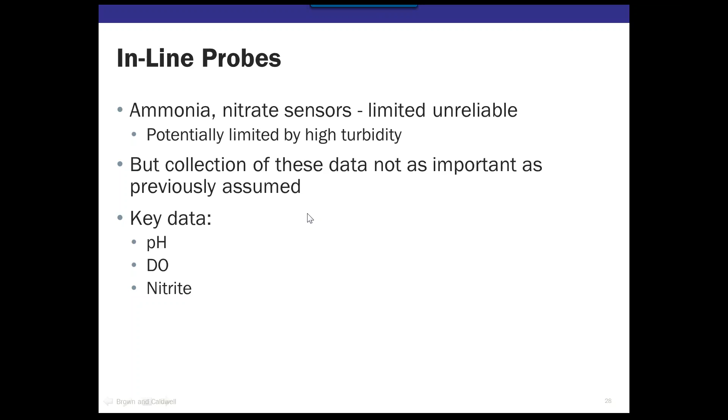Our feed TSS was pretty high, and because we had that storage tank ahead of the pilot, we were able to settle out a lot of the solids. Our target goal was 85%, we got to 82% or so. You'll see how we got to almost 100% in the last stages of the test, and our TIN removal exceeded our goal.

The other thing is, despite these numerous interruptions and a toxicity event I'll show you in a moment, the system just kept trucking along at this kind of performance level. So my interpretation of this is that these organisms are very, very robust. You can beat them over the head with a 2x4, and they seem to be totally immune to a lot of difficult operating conditions. So was it a success?

Well, you saw the performance data. Our belief, and everybody who was associated with the test was convinced that these are pretty robust organisms. This process was time-based control, and the only critical measurements we needed to make were pH and DO. I'll talk about this in a moment. The staff had the opportunity to gain familiarity with the process, and we developed a couple of simpler methods to measure the Anammox bacteria than would have been available prior to this point.

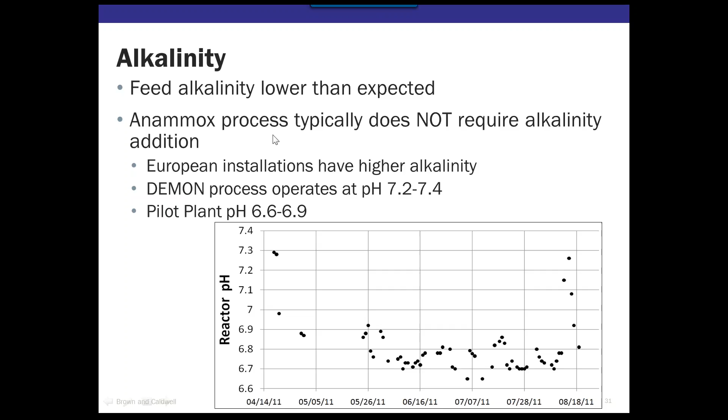So a couple of points to note. Centrate solids concentration was pretty high, and this is related to the way in which the county managed its solids dewatering system. Fortunately we were able to settle a lot of the solids out, but it meant that we had to design for sludge removal as a pre-treatment step.

Inline probes, some of them were not reliable. We thought it was related to the turbidity, but in any case, the data were not critical. These are the three items that we found to be critical.

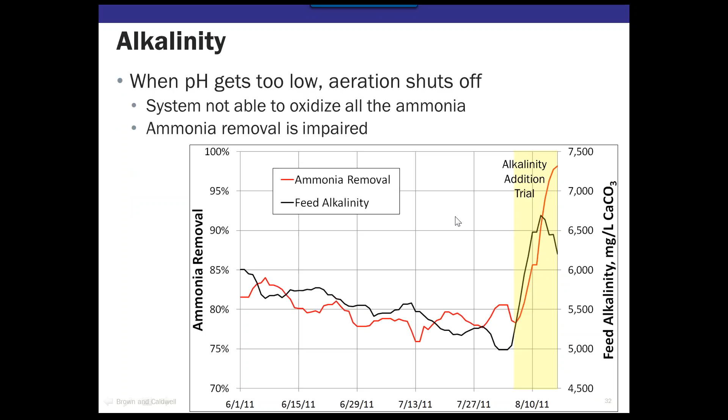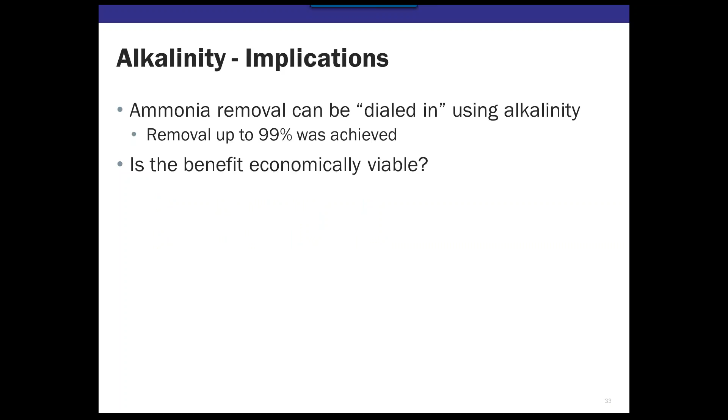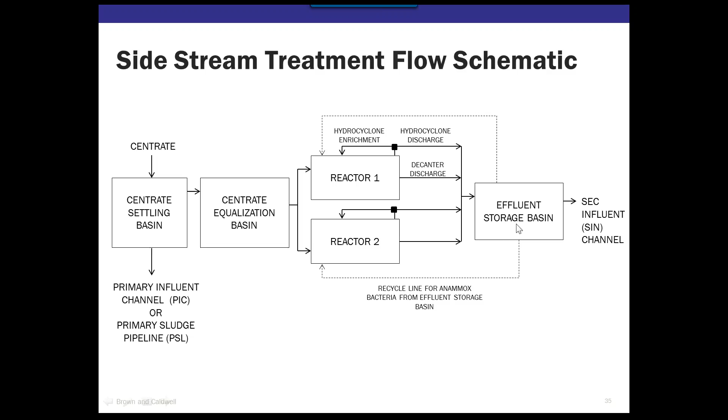And the take-home message here was that nitrites are not toxic, as the literature indicates, but they're inhibitory and they're reversible. The Anammox bacteria recover very quickly, but at the same time, it's important to track these nitrite concentrations so you don't get into this kind of situation that we did.

Alkalinity - our expectation, based on all the European installations, was that the process would operate around pH 7. As it turned out, if you look at the data collected here, the pH drifted down to pretty low levels. It finally stabilized at about 6.7 or so.

It turns out that the influent alkalinity in dewatering streams, if you look at the European installations, tends to have a higher level of alkalinity. So they were not prepared for us having to add alkalinity.

Just for the sheer heck of it, at the end of the trial, before we had to give up the pilot, we threw in half a bag of alkalinity, and the system responded immediately. We were able to achieve almost 100% ammonia removal.

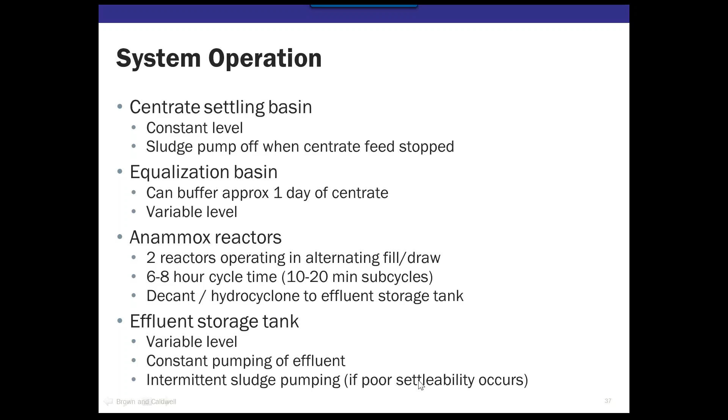The operation was based on 7 days a week operation, but in the early days of the plant it's probably going to be less than this. So the equalization tanks are going to be helpful in that transition period.

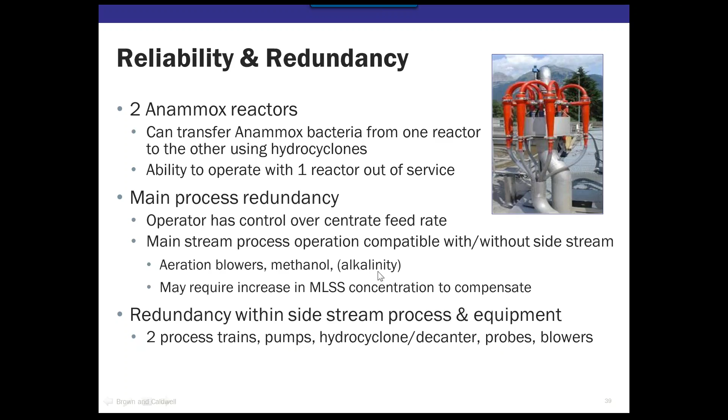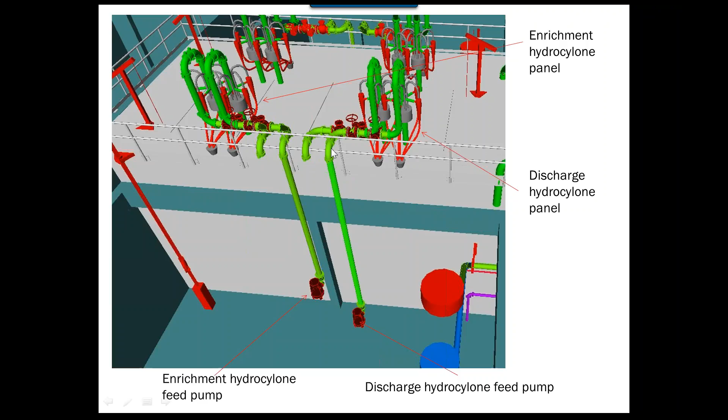Going back to the details, the equalization basin can provide up to 1 day of hydraulic retention time. It will operate on a variable level. And the two reactors, with a 6 to 8 hour cycle time, will operate in an alternating sort of fill and draw basis.

Then the decant will pass through a hydrocyclone to the effluent storage tank. The storage tank itself is a variable level facility with the ability to constantly pump the effluent to the mainstream and periodically take out sludge using the hydrocyclones if the settleability is not as good as expected.

The county was concerned about reliability and redundancies, which is why we have two Anammox reactors. We can transfer sludge from one reactor to the other using the cyclones. We can operate with one reactor out of service.

There is the ability that, in the worst case scenario, the mainstream process will have the ability to take the full side stream flow if necessary. And then lastly, we've got redundancy with the two process trains in terms of the pumps, the hydrocyclones, probes, and blowers.